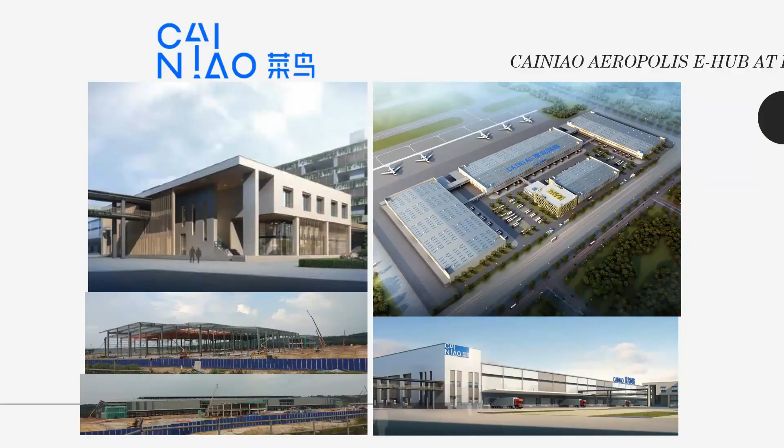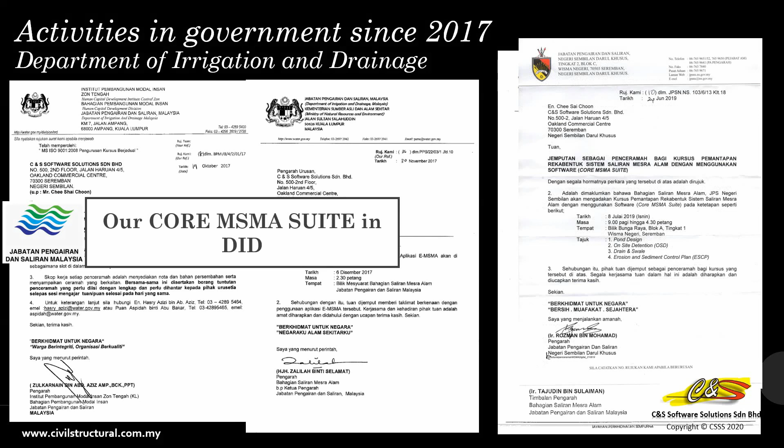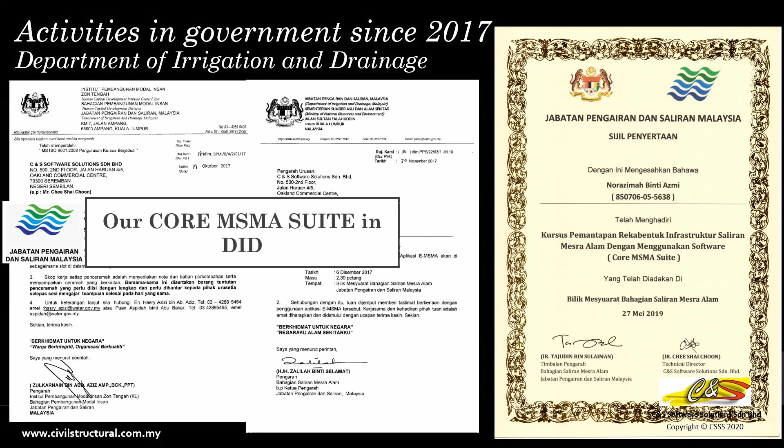This is some of our certification about training or workshops. At the same time, our Core MSMA program was conducted in JPS in 2017. We were engaged by them to help improve their MSMA in Malaysia. This is one of the events carried out at JPS MSMA HQ.

At the same time, I posted this - this is last year's event about the ESCP. I posted it because this was our largest event, among so many events we have done. About 100 people attended the event.

I have already been in this field for 26 years. What's the difference? I'm passionate about technology. I always follow up with Google Cloud, Microsoft, Amazon. I've even gone to showcases like the BMW Sales Gallery in Germany in 2016 for BricsCAD products.

Now we move on. First and foremost, some common problems in your Earthworks. You should know that normally we are fighting with deadlines. Your clients become more demanding. How do we want to handle this? At the same time, certain parts will be very difficult for you to explain in some sort of 2D layout.

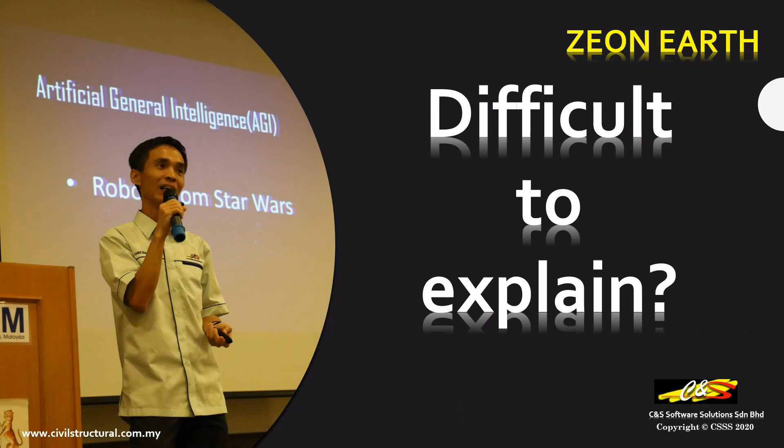Or you need a presentation, you want to tell the client what's happening. If you have a software, the software might be powerful, then you may wonder how to start. Remember, you don't always use the software daily - this month you're doing earthworks, after that you're doing drainage, then sewerage, water supply. Only when you come back, it may be 1-2 weeks later or a month later. Can you recall what has been happening?

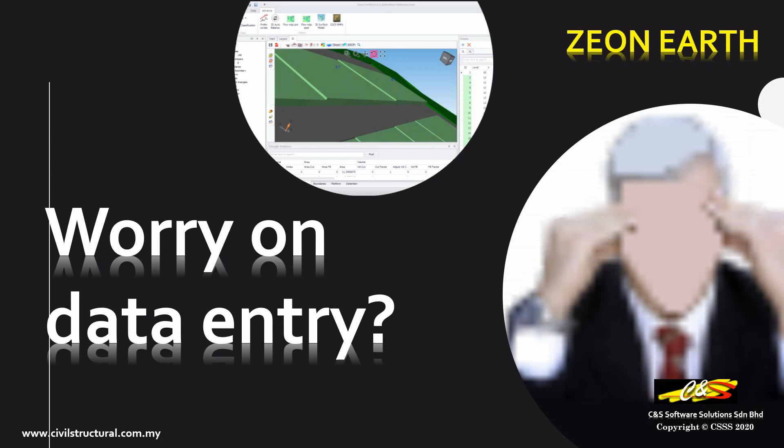So the other part, you may be worried. After you do the data entry in the software, you may wonder whether the data entry is correct or not. Especially in structural software - you can see structural software nowadays is so powerful, so many commands, but somehow after you're done, you don't know whether it's correct or not. This is some of the issues you'll always encounter. But don't worry, if you are doing this work, we have a solution for you - ZeonEarth.

Our ZeonEarth can help you. We go for simplicity. Simplicity makes a difference. We are not building a powerful software, like for example, Autodesk Civil 3D. It's so powerful, so many commands there, but it becomes complex.

From my experience, if you really want to master Civil 3D, it might take you close to one month to complete your training over there before you can start your work. But somehow in our ZeonEarth, we go the other way around. It can be as short as half an hour. Why can it be like this?

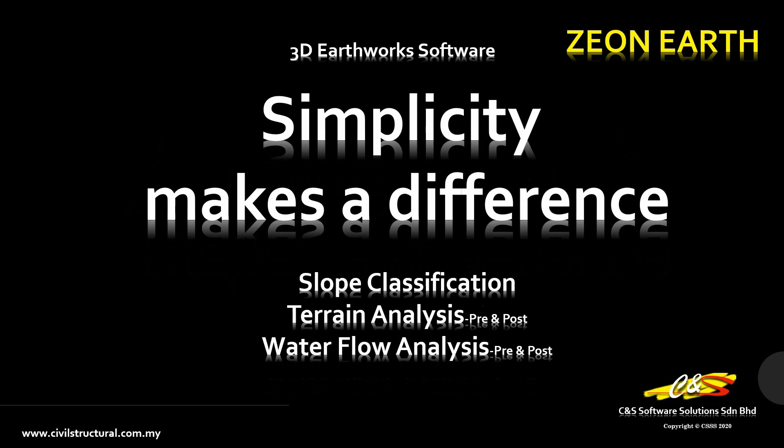This is some of our additional features on our full edition of the ZeonEarth. We got slope classification, terrain analysis, and water flow analysis.

So let's go into our conventional software. Normally, in the engineering software, they involve drafting. After day one, you will open the software, do operations like data entry and so on, and get it run. Then you see the answer, review it, change it, and go back another round and round until you find the thing that satisfies what you want.

But in our ZeonEarth, now there is a difference. We cut down one level where now we don't need data entry. The moment you finish your drafting, the ZeonEarth data is ready. This is how it works: drafting, then direct go to our software and get it run. You review and change. So in a way, it cuts short the operation process, so the timing for running is faster.

Therefore, it comes to a short learning curve. So just as I mentioned, it can be as short as half an hour, but our latest record is that our client can start in 15 minutes.

As a result, this can be handled by a draft person. In a way, for a company, this can be a cost saving. You are engaging a draft person to do the data entry as compared to an engineer to do the work. You know that a lot of structural software requires an engineer to operate, which is very costly because you engage the engineer to become a software operator. This saves time.

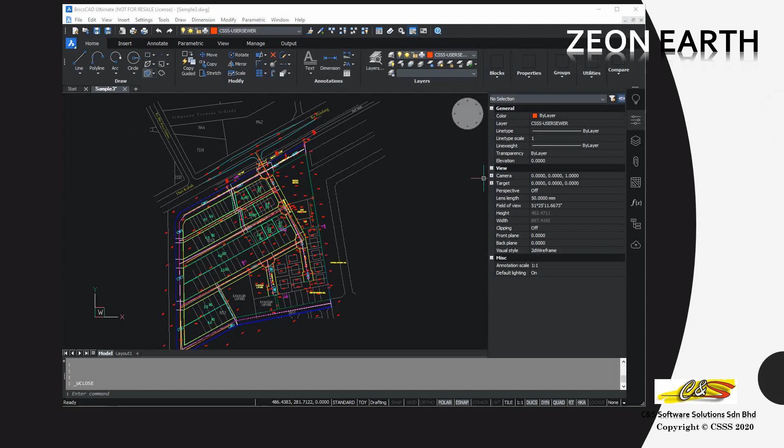So this is our ZeonEarth. It works in any CAD software. This is a BricsCAD view. It can be as simple as some mouse clicks, as you'll notice later on.

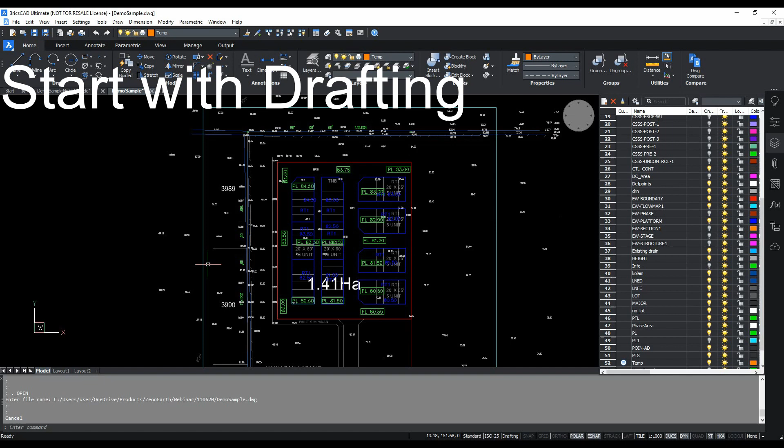Let's look at the drawing to prepare the data. Before you start anything, you need to use three commands in the drafting: add polyline, add text, and create layer. First and foremost, you need to go to the layer part and create your layers, such as EW boundary and EW platform. After that, you have your layers.

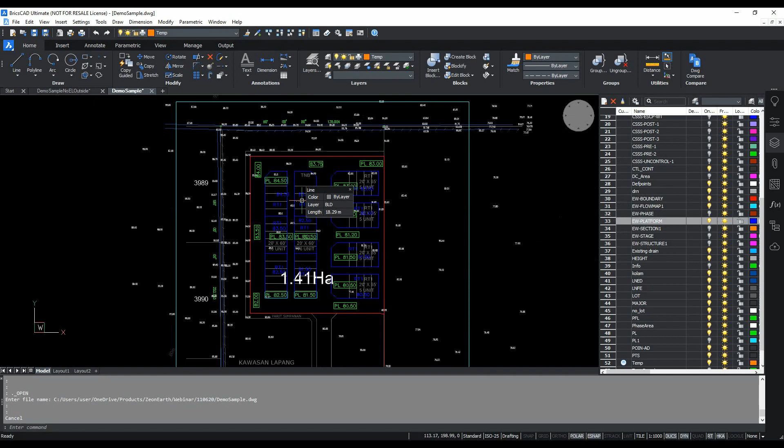Then we go to our drawing here, for example this project. Before we start anything, we need to tell the computer where your project boundary is to be defined. From here, we use a polyline to create that. To create a project boundary under EW boundary, it's in the polyline commands. Make sure this polyline is closed.

After that, once you have it, you may need to create a platform, which is under EW platform, under the polyline. This is also a closed platform. At the same time, you must tell the computer the level of your platform, so you put that into the EW platform under the text entity.

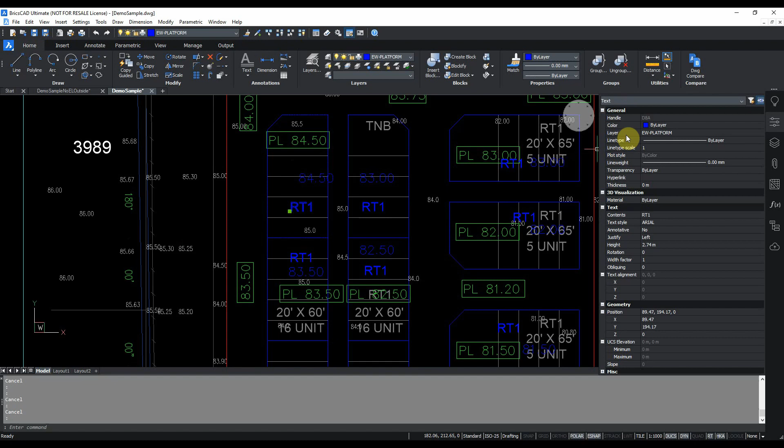Then you might need to tell the computer the type of property you need to have - here it's RT1, under EW platform, under the text entity. Then you may need to add a bit further, the proposed level. From here we create a proposed level, inside any layer you want, under the text entity.

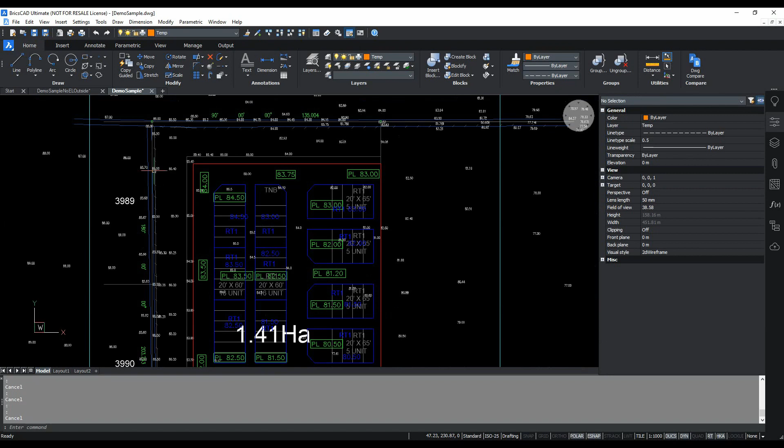From here, we need to go a bit further. Before we go into our ZeonEarth, you need to tell the computer what your existing layers for your survey data are. Here we have it under the height layers, as a text entity. This is enough for you to create your ZeonEarth data.

Based on what I showed you, now we go to a summary about our quick demo. We can notice that with just a few mouse clicks, you can run it.

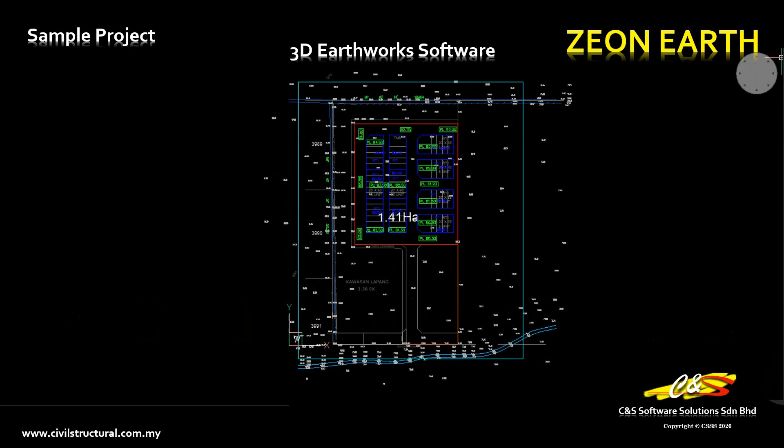Okay, this is the first step. For starting on the ZeonEarth, you need to go for data entry, just as I showed you in the CAD software how I operate it. But here is a summary.

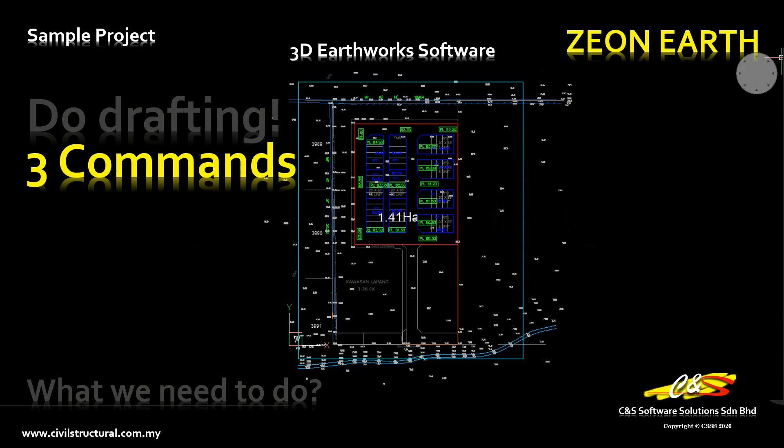First, you need to do drafting. Three commands, like I mentioned: create layers, draw polyline, add text. This is a prerequisite for our software. So from there, you draw a boundary and define it.

It may take you 10 seconds. Then after that, you draw a platform. Remember, it's a closed platform. Here we got 10 platforms, so we got 100 seconds. Then add a text inside the platforms. It might take you another 15 seconds, so you've got 150 seconds.

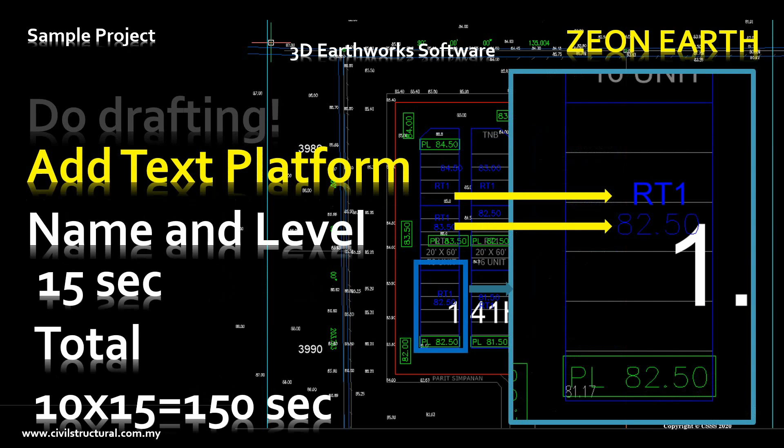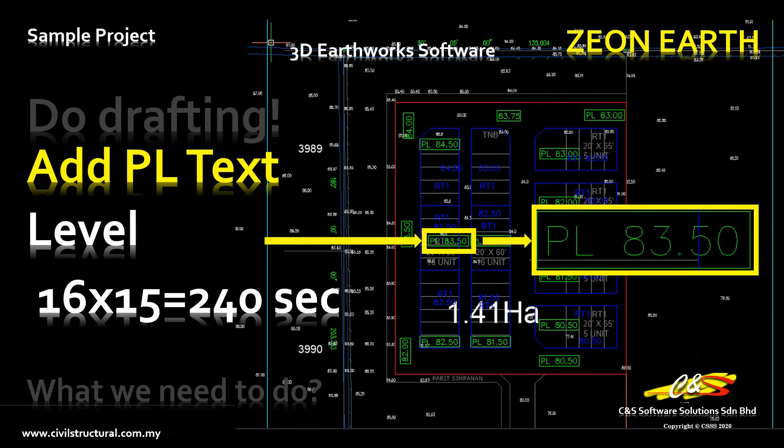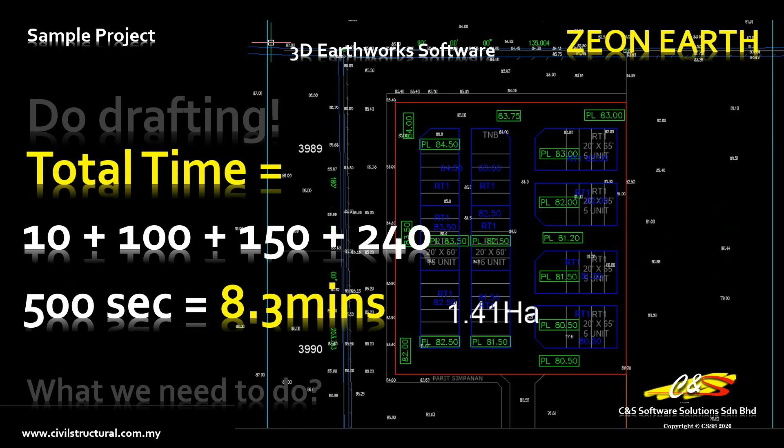Then the levels for proposed level is all in the text layers, or it may take a bit more, 240 seconds. After that, we just sum up. It takes you about 8 minutes, let's say 9 minutes. 9 minutes to prepare your drafting for our ZeonEarth, inclusive of your drafting.

So it's time for us to go for a demo. Let's launch our ZeonEarth. Here is our full edition.

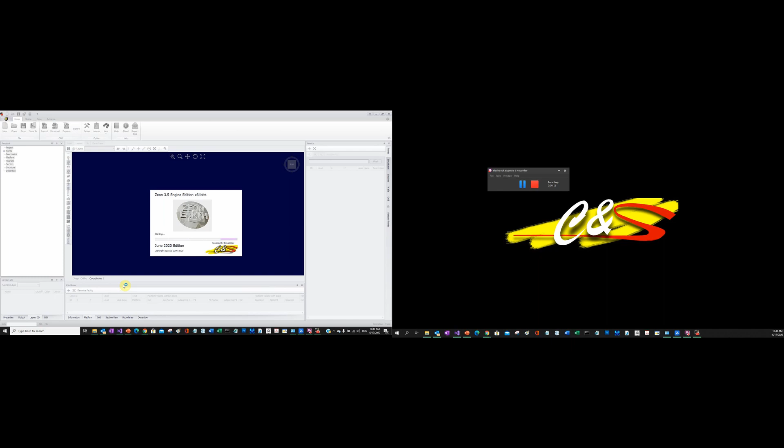The moment you see our ZeonEarth launch, it will lead you to open the file where you want to use it on. Click here to find the drawing where just now I showed the samples. Wait for it to load. After you load, click for the import. Proceed further. This portion is important because this is a layer inside your CAD drawing where it's been captured on.

This is a column for existing data. This is the proposed data. Now we need to navigate to the height. Remember, the height is your survey point. Just take it. Then we got one more proposed level. Just take it. Only these two to take on.

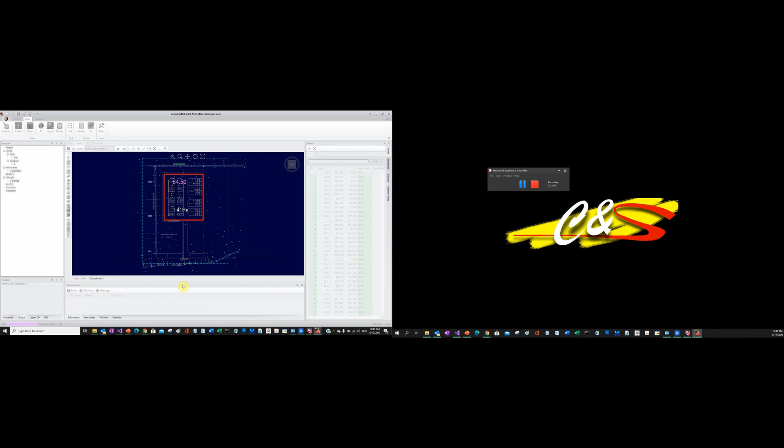You can proceed on your data. The rest you can leave it. Just click OK. What's the next step? Our next step, the answer for you is wait, nothing else. You have nothing to do on our software. You need not do any data entry, whatever. You just wait until you get your answer for your cut and fill.

That's all, so simple. You can see now, just import and run in our software. Get it running. Behind the screen is a 2D layout, cut and fill layouts. And after that, you can proceed directly to our 3D view.

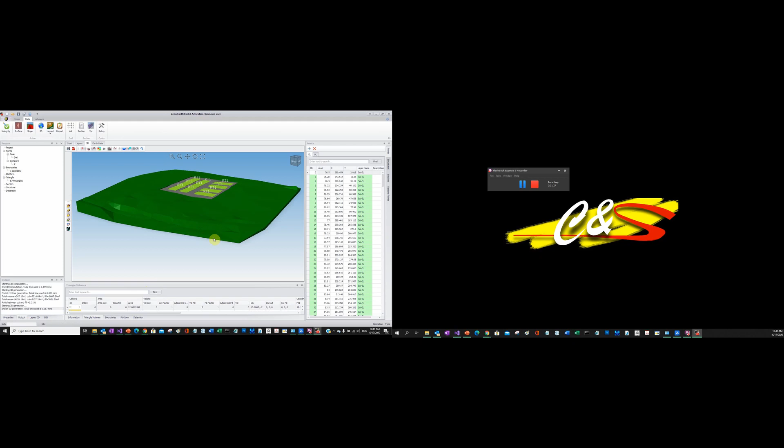Wait for a while, it will generate the whole 3D model. But you can see over there, this is your design. At the same time, you can see the wording, the RL note. We do nothing here because the computer captures it directly from the CAD drawing.

What you did in the RL is the defining of the platform, do you remember? So this model can actually be saved into the CAD drawing. You can open it later on in any CAD software.

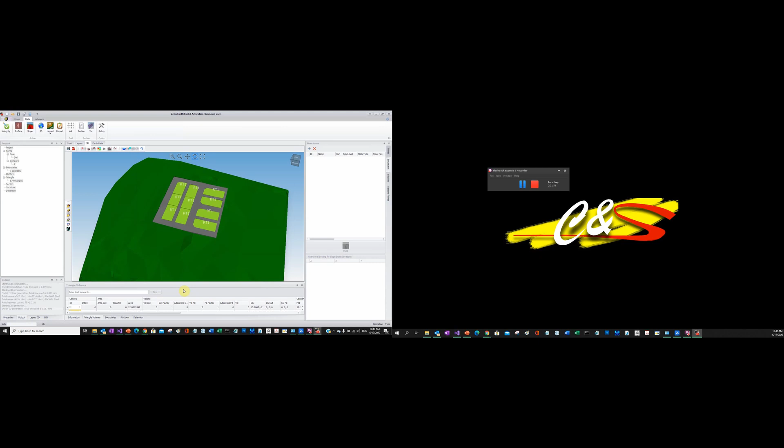Once this is ready, another part you may be interested in is profiling cross-section. Normally after your work is done, you will ask your drafter, hey, can you cut this section for me or that section for me? But here our computer has one mode called lazy mode.

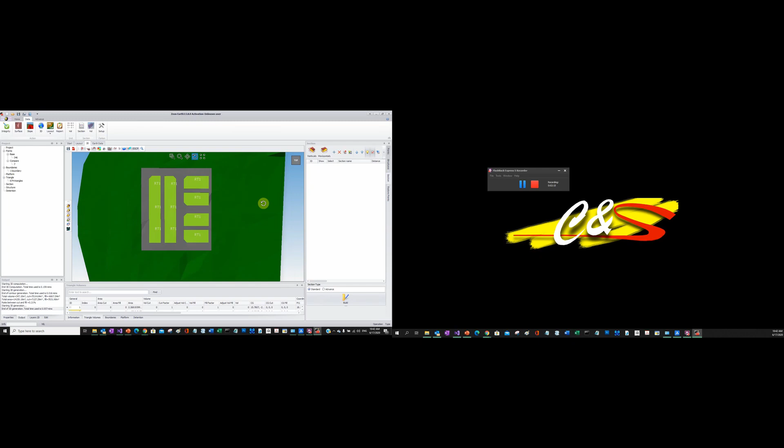What I mean is that we created it for the lazy people. So from here you can see one vertical button and horizontal button. Even to plot your section vertically, I can click on it, so it will proceed with the plotting. From here it's a 10-meter interval. You can change the setting under the setup. Yes, I make it proceed, so just view it on.

Wait for the generation, for the thing to be generated. You can see over here the section that's been generated. After the section is generated, you just navigate and check, you just pick whatever section you want. You need not try and error, try this, try that, because the computer will plot every section for you.

Okay, you can see many lines have been drawn. So this right side shows the sections. When I navigate, you see the yellow color line, this is the corresponding section that has been plotted. At the same time, below here, these are the sections that have been captured in 2D.

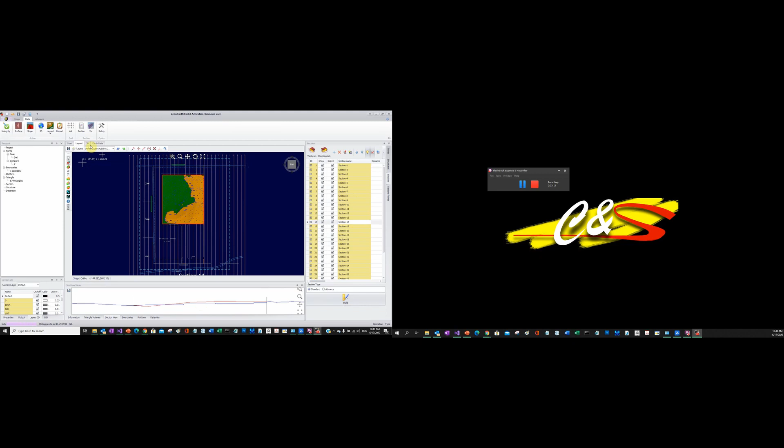You can save it in the CAD drawing for your further work. At the same time, we go for 3D, you can see the section also captured in the 3D. If I zoom in, you can see this is a proposed level, red color is existing. You can manipulate your checkbox to play around with all those things.

You pick whatever you want, then you proceed on. So from here, actually this is the basic CAD section. If you have another software called X Section, it can present it a bit better. You can go for scaling, coloring, all those things, some of the settings in the drafting.

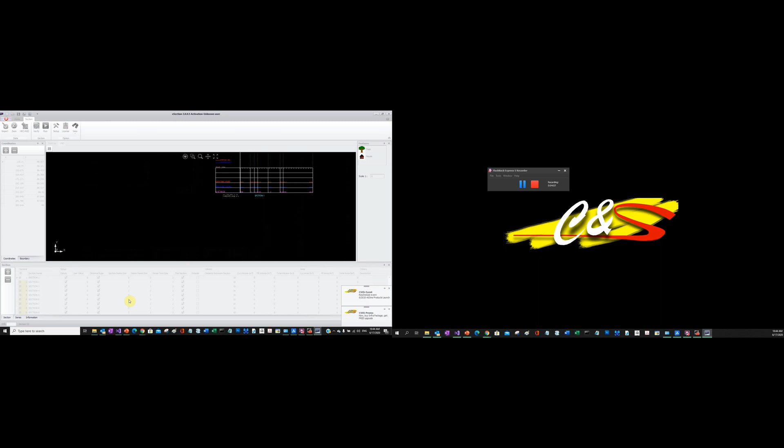This is our X Section, it comes along with our full edition. Once the software has been launched, after you generate the section, you should go for ZeonEarth. It will automatically capture the section that has been plotted for you, and automatically insert all the sections that have been plotted. This is not so well organized, but it captures the basic data for you.

Maybe this interval is not so nice, the text horizontal, maybe you have to change the scale too high, whatever, you can go to setup to make some settings. Then we navigate on and make some changes along what you want. Let's say my datum, I need to go for 75. Then I need to set the constant interval to 10 meters. Maybe my text, I don't want horizontal text, so I uncheck it, then click OK. What I need to do is verify and rerun again.

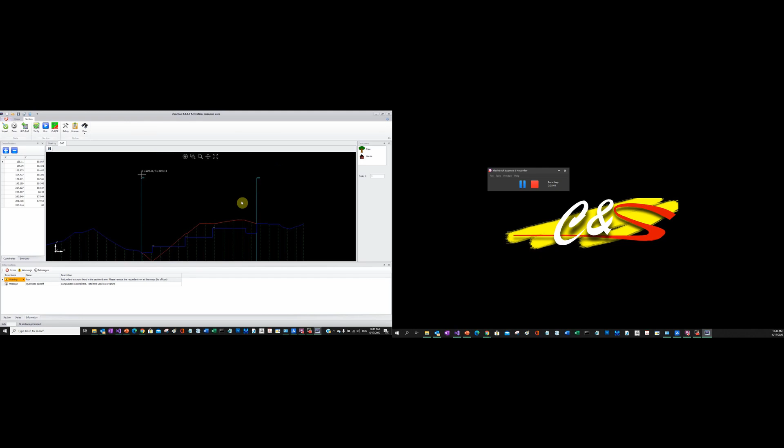So after I'm done, you can see all the sections have been produced in a better way. At the same time, when we zoom in, you can see this boundary is automatically captured from the software, you don't need to do anything. At the same time, certain platforms you have to define, and we also mark that for you. This is about our X Section, you can do it.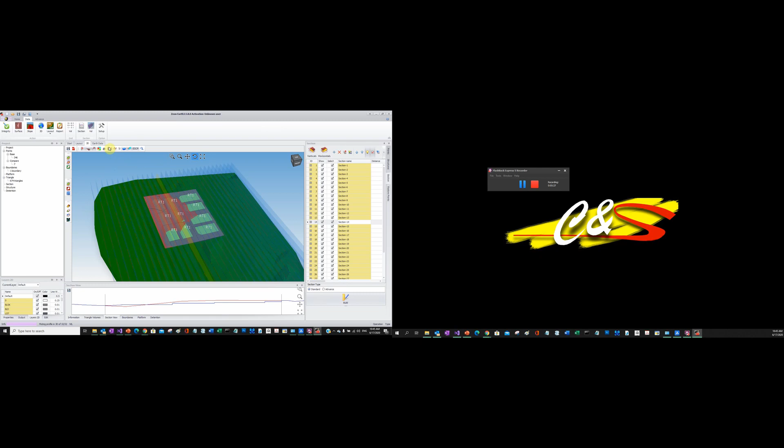After you get the thing, you can manipulate all the outcome. Even in this 3D, you can play around with all the checkboxes. You can see this existing terrain with the contour line. Contour line can be set, or I can turn it on, I may make combinations, or what else - you can play around. Then this is the height elevations, like this, under our full edition and so on.

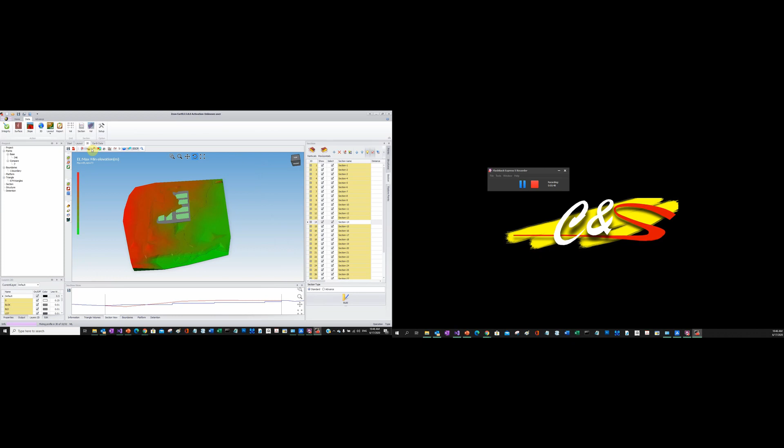Do you think it's very difficult operating our Zeon Earth? It's simple, that's all, nothing else. This is the 2D layout, this is a 3D layout. Once you've got it on, then it's finished already. If you're not happy with anything, just go back to our CatsRoid, review it, import it, and rerun again. That's all.

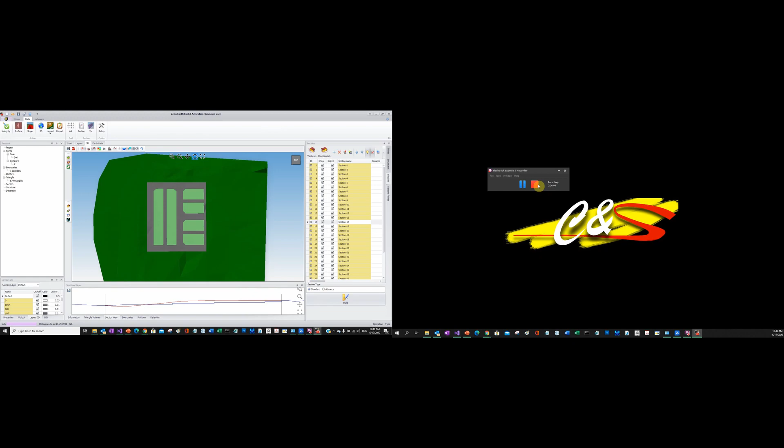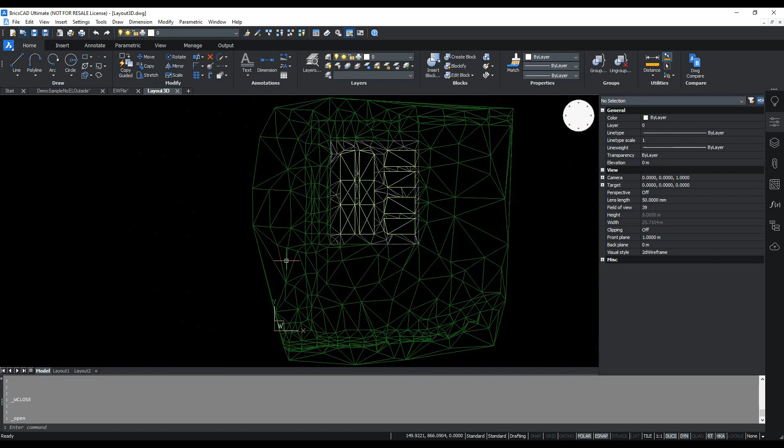From CatsRoid being saved in 3D, you can use any CAD software that supports 3D, like AutoCAD Full Edition or BricsCAD Pro. Over there, you can open it and view the file that's been created. There's one handy part: when you want to do a presentation to your client, you don't need to carry the software and run it in front of your client. From here, you can change the visual style in AutoCAD or whatever, to shaded, then your whole model has been imported into a CAD software. So it becomes handy, all your communication becomes simpler and easier. This is our CAD software in 3D.

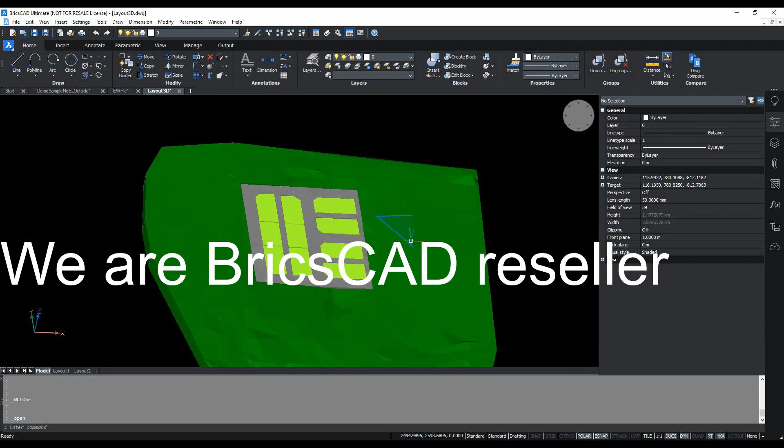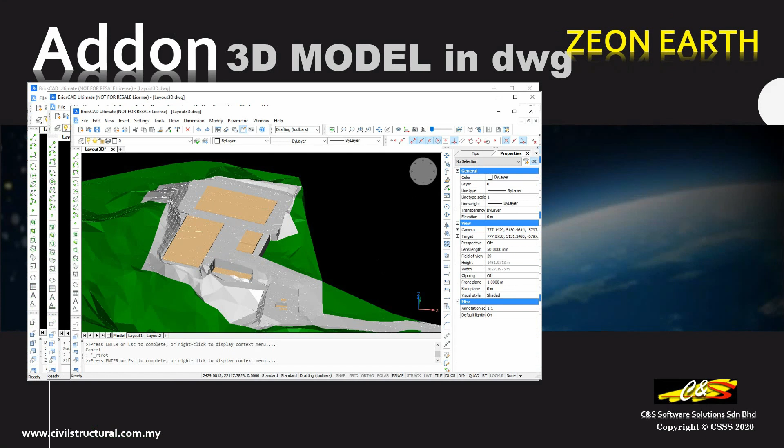You can see here, this is one of the complex models we've carried out, generated by our Zeon Earth with full 3D models, and it can be exported into our CAD software, as I showed you earlier. Actually, we are the reseller, if you're interested, come to us also.

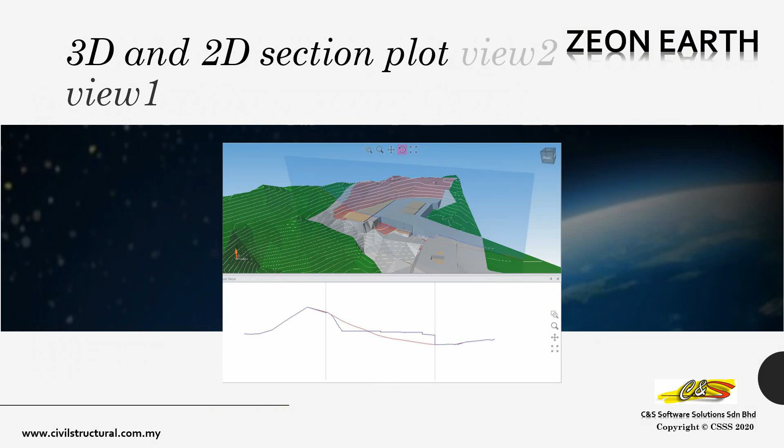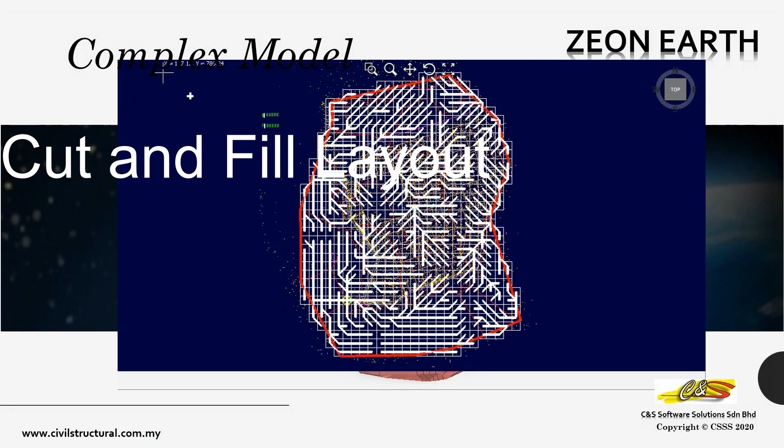It's a full 3D model, you can have many combinations of views to present to your client. Do you think this will be more simple than reading a CAD drawing? Another complex model - you can see this is our flow map, in our advanced edition, where you can identify how the water flows in your projects. Then cut and fill, color height, or another kind, flow maps, or this is slope classification. This is our auto slope in our advanced edition.

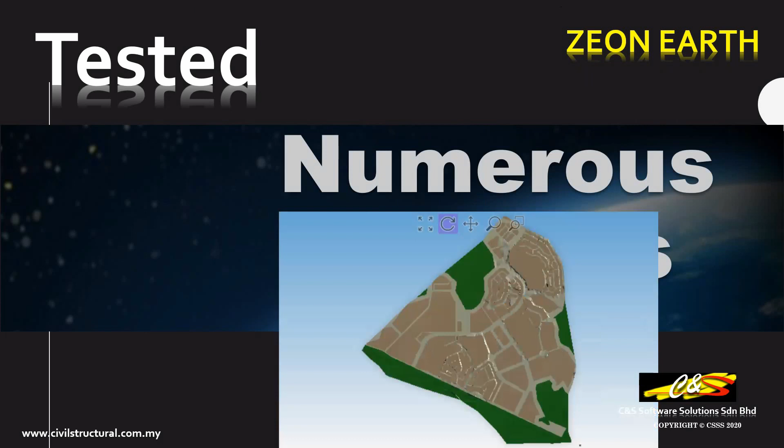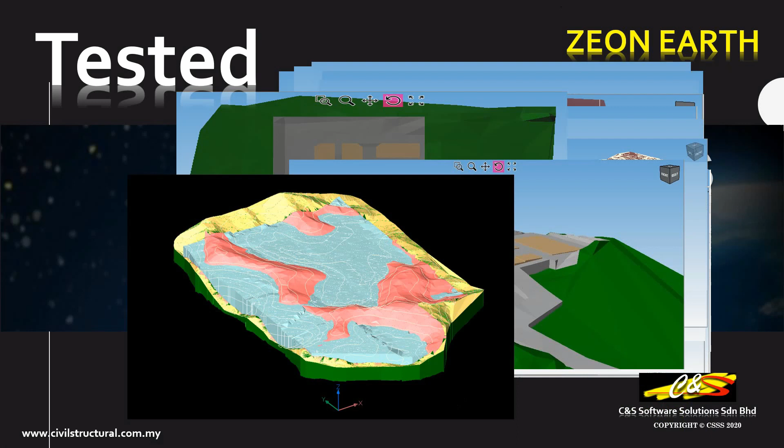Besides, we have been tested for numerous projects. You can see many project views we've been tested on. So what we want to tell you is that we've done a lot of testing. This gives you confidence in how it looks, because it's what you see is what you get, or you just need to model your CAD drawing by your points.

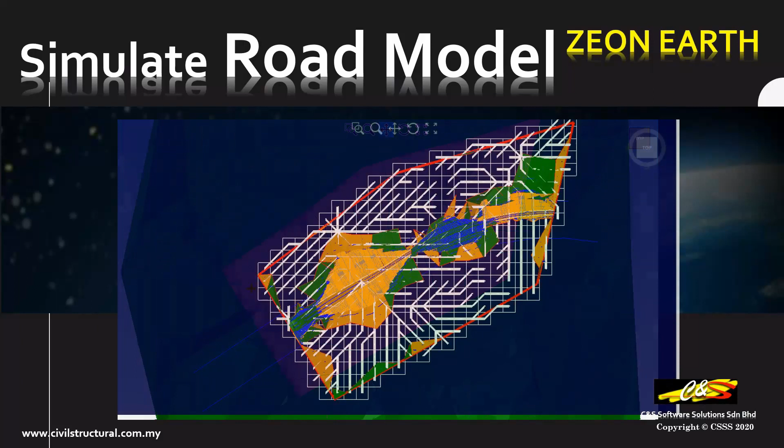At the same time, our ZeonEarth is not a road software, but somehow we can still simulate a road design. This is one example we tested and tried to show you. You can see this is a full 3D model. We can walk through it, just snapping pictures of the 3D model inside there.

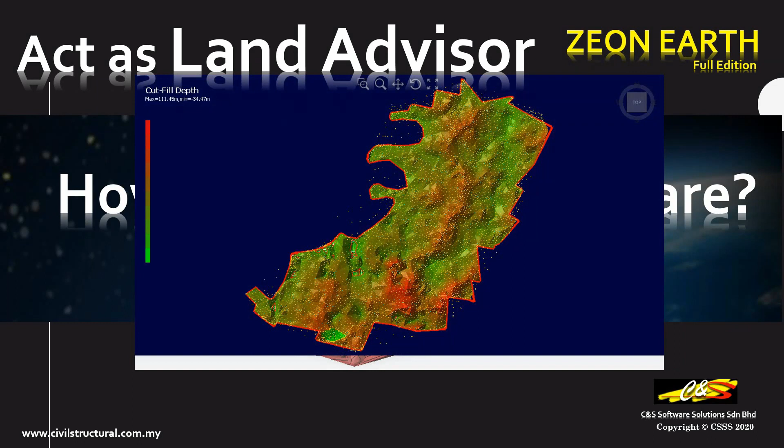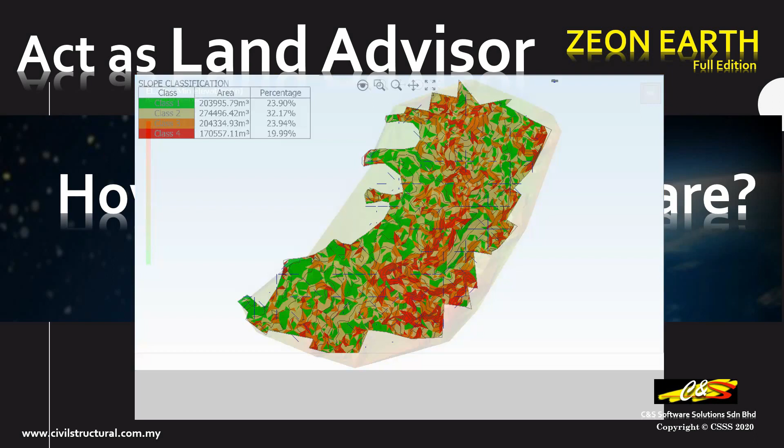Then the advanced features, like I talked about just now, the land advisor, you can do a terrain analysis, analyze your terrain flow map, slope classification, all those things. With this kind of feature, you can help your client do an analysis for their land, if they want to buy land.

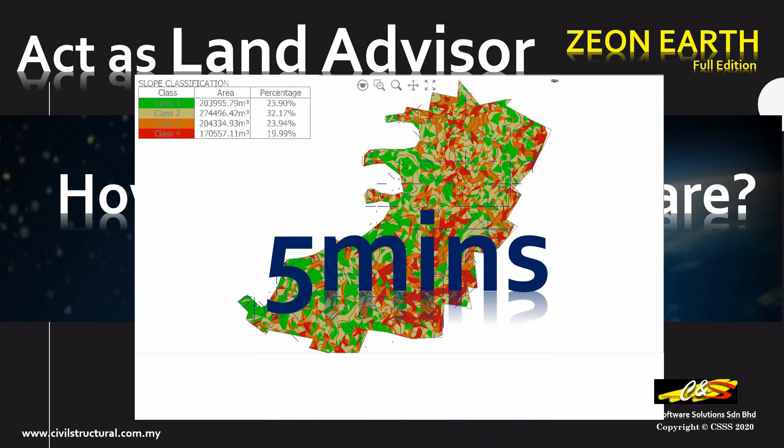How much time is spent on this? Actually it's less than 5 minutes. What you need to do for this case, since we don't have any proposed level, is just draw a polyline for the project and identify your survey layer name in CAD only. So it takes about 5 minutes to finish it.

Is it simple? Then we did some benchmarking. We tested on a 700 acre project to see how much time we'd spend. It took less than 3 hours to complete.

Furthermore, this is a full edition slope classification, just like I showed you. It can classify for you into class 1, 2, 3, 4.

Then, the flow map—this is quite important. Our flow map can generate into 3D. You can see how the water flows in your project. It's very helpful for stormwater work or ESCP projects.

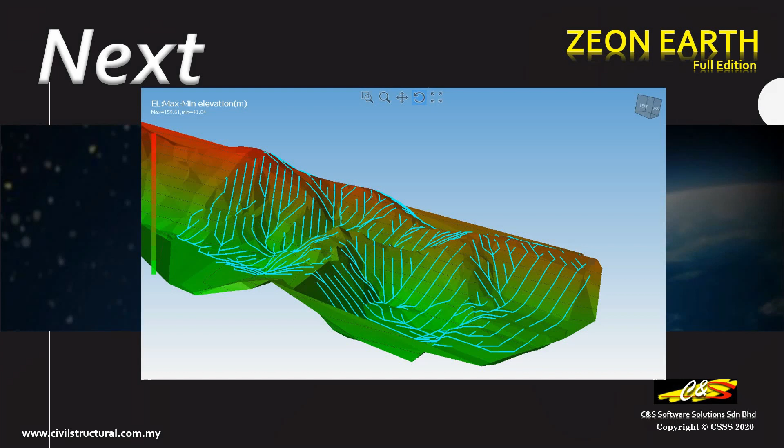This 3D model can also be imported into AutoCAD, Revit, and other external software. It's not limited to us—it works with Tekla, Structures, and others as well.

One of our clients uses this to simulate pile penetration length, but this is done by BricsCAD's BIM function over there.

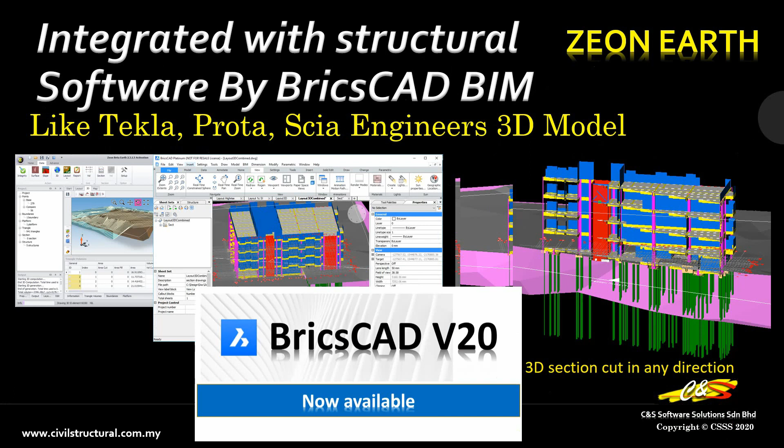Or a training course—if you want us to teach you, we can arrange a time. I can come over to show you and teach you about the theory, concept, and software.

So all of this is given—you have no worry about how to manage the work. Not like other software, where they just show you the software only. Other than that, they can't teach you anything, even when there's a technical problem, they can't help. So training is by demand, by request—we'll go and train you.

Or you can stay tuned to our events. This really helps you.

Or with a 3D model, we can serve your deadline—explanation with 3D, presentation with 3D, operating the software is simple, the learning curve is there. So it's all solved for you.